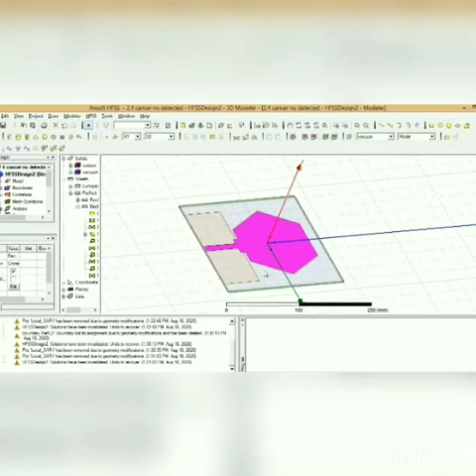The antenna consists of a hexagonal patch, cotton substrate to offer wearable property, and ground plane with transmission line feeding. Low radiation of 6 dB, radiation decreases. Feeding is shielded from the antenna by a conducting plane with hole aperture to transmit energy to the antenna.

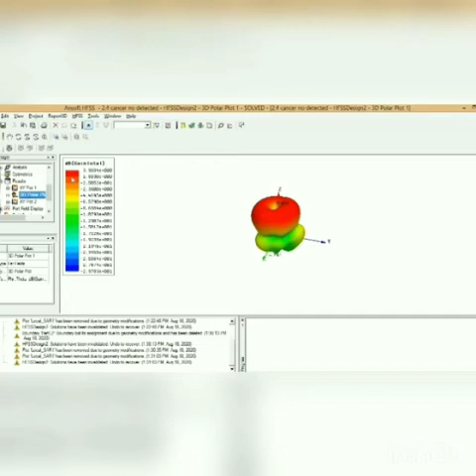Our project is used to detect early breast cancer using a wearable antenna. We can now observe in the first case the cancer is not detected. Here in the model over the patch we can observe normal cell with no tumor, regulation and conduction. Return loss is minus 30.86 dB, gain of 4.62 dB with no cancer detection.

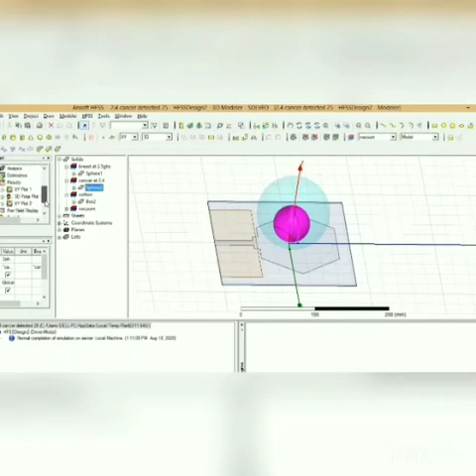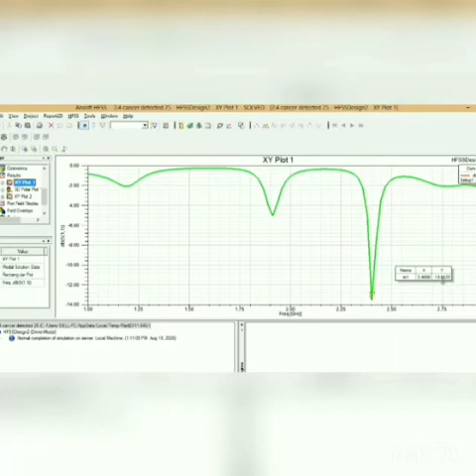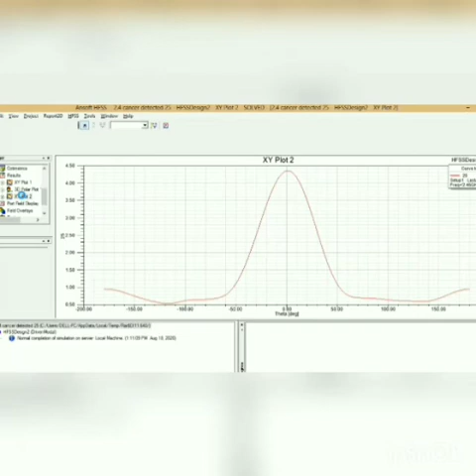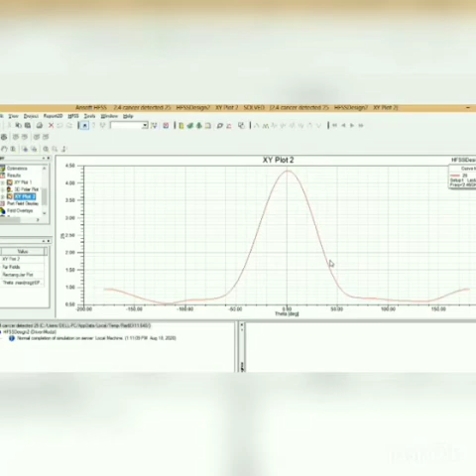Now after completion of simulation work, we come to the fabrication work, as we have to compare our cotton substrate result with FR4 substrate. The fabricated antenna is tested in an anechoic chamber where the noise is very less. The process is going on as shown here. The process is ongoing in the anechoic chamber with the proposed antenna to get optimum results of the antenna, as we are comparing these FR4 substrate results to our cotton substrate result.

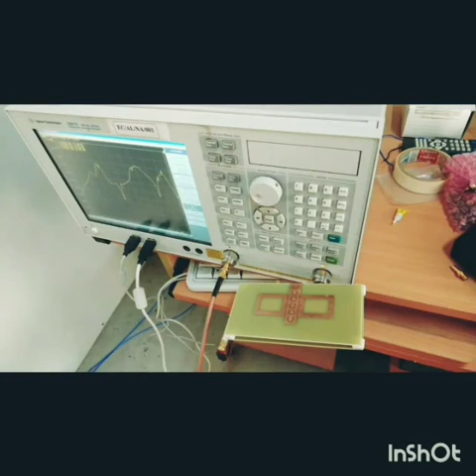Here the inset feeding technique is used, whereas for the wearable property the cotton substrate is used and it has the transmission line feeding technique. With these results we came to know that FR4 does not have a wearable property. After this process we check the wearable property of the cotton substrate. It has a wearable property and then we'll come to the conclusion. Now coming to next, it is a device called network analyzer which measures antenna parameters.

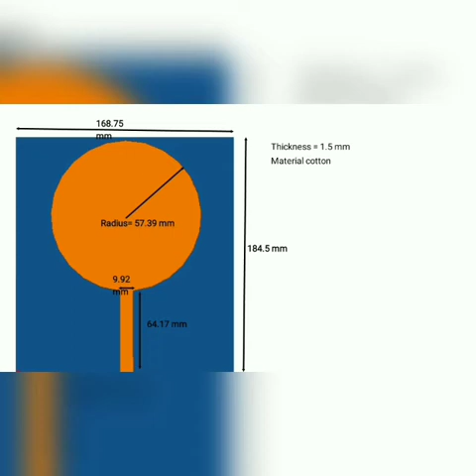After the results of FR4 substrate, now coming to our wearable cotton substrate, as we can observe in the figure, it is a material of cotton with thickness of 1.5 mm, length of 184.5 mm, width 168.75 mm and radius of 57.39 mm. As we can see the copper plate here to hold the property. By considering SAR, specific absorption rate,

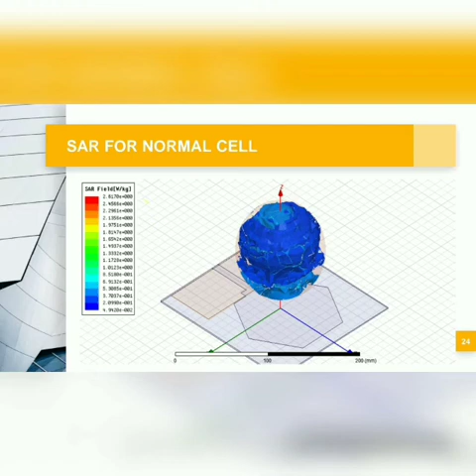We gave this model for fabrication and testing under two conditions, bending and folding, bending for 20 cm maximum, and folding, and we can see gain as 6 dB. Now we finally compared our cotton substrate result with FR4 substrate result and we came to know that cotton holds good for wearable property. Now we have concluded and shown all the results including fabrication and testing.